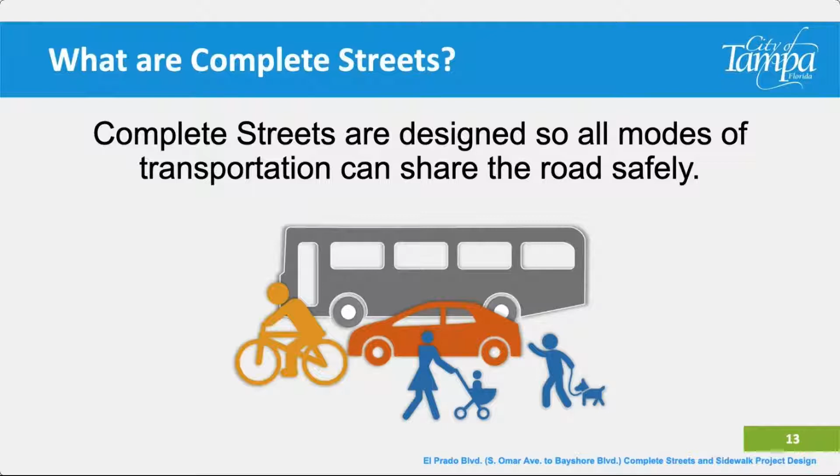Complete streets improve safety, promote active transportation, improve health, lower transportation costs, provide transportation alternatives, ease congestion, and create a sense of community. It is important to design a street to the surrounding context. There is no single design application for complete streets.

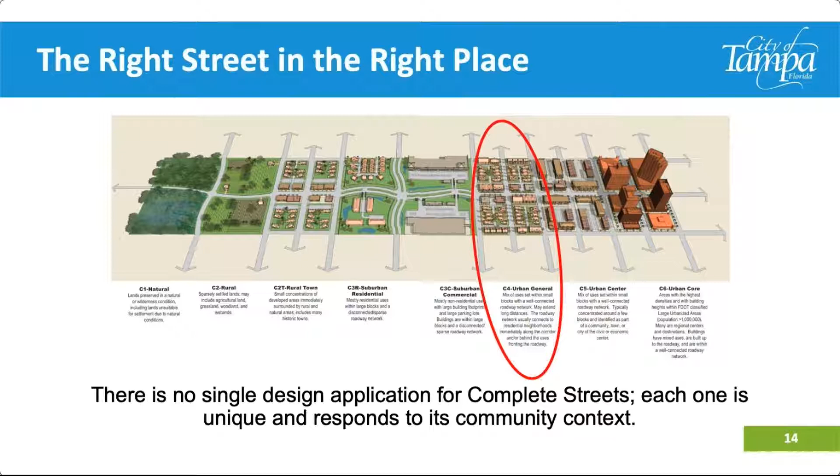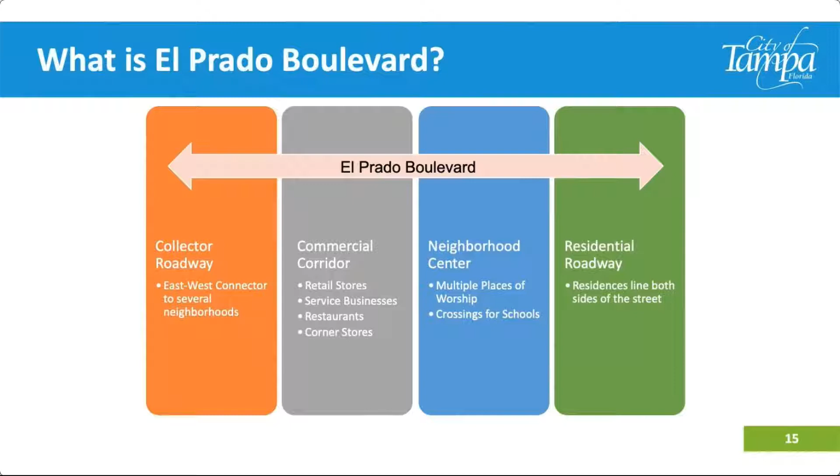Each one is unique and responds to its community context. El Prado Boulevard generally falls within the C4 Urban General Designation of the Florida Design Manual. It serves as a collector roadway connecting neighborhoods, a commercial corridor with a variety of shops, a neighborhood center connecting people to schools and places of worship, and a residential roadway with residences lining both sides of the road.

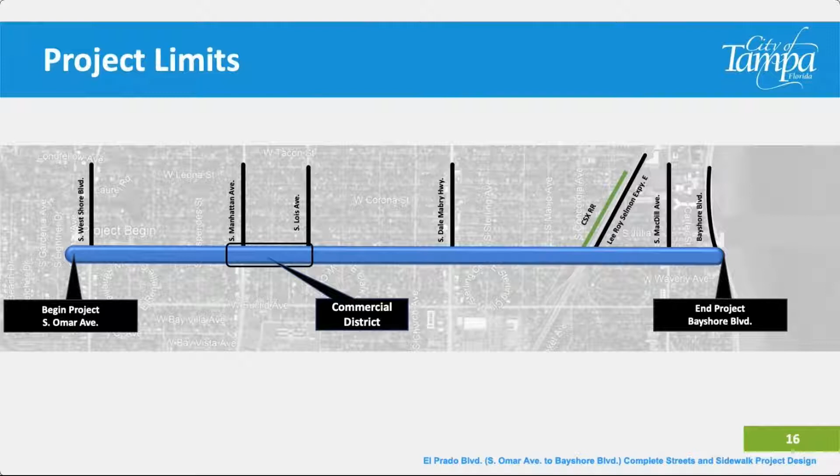The improvements proposed along El Prado Boulevard extend from South Omar Avenue to Bayshore Boulevard, with additional coordination in the commercial district. We are in the very early stages of design, and your input and suggestions are valuable. A second public meeting showing more details of the proposed improvements will be held when the design is further along.

The background behind this project is as follows. In 2009, the City of Tampa updated its comprehensive plan to encourage growth within Tampa's three core business centers: downtown, Westshore, and University of South Florida, USF. This vision for infill and urban redevelopment is predicated on enhancing mobility without relying exclusively on automobiles.

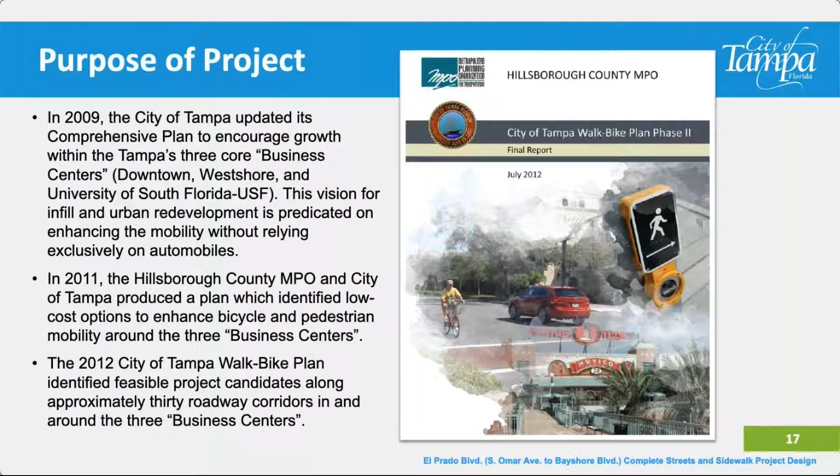In 2011, the Hillsborough County MPO and City of Tampa produced a plan which identified low-cost options to enhance bicycle and pedestrian mobility around the three business centers. The 2012 City of Tampa Walk Bike Plan identified feasible project candidates along approximately 30 roadway corridors in and around the three business centers. In the next few slides, we will examine deficiencies within the corridor that were noted by our project team.

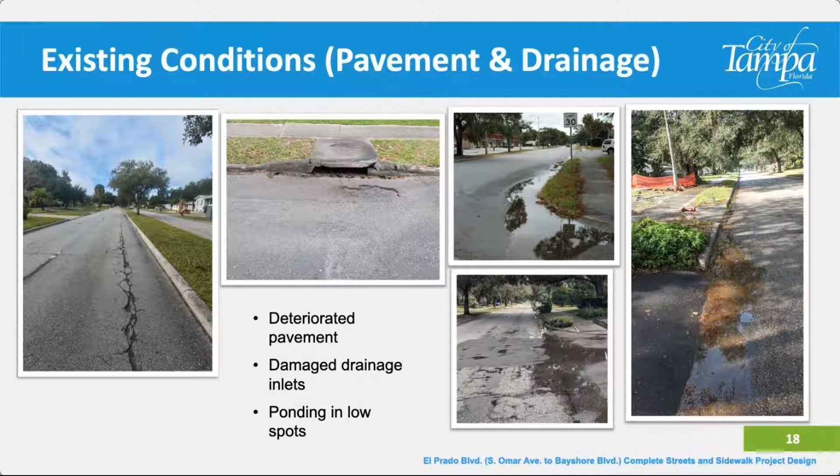Currently, El Prado Boulevard has deteriorated pavement, damaged drainage inlets, and several areas of stormwater ponding.

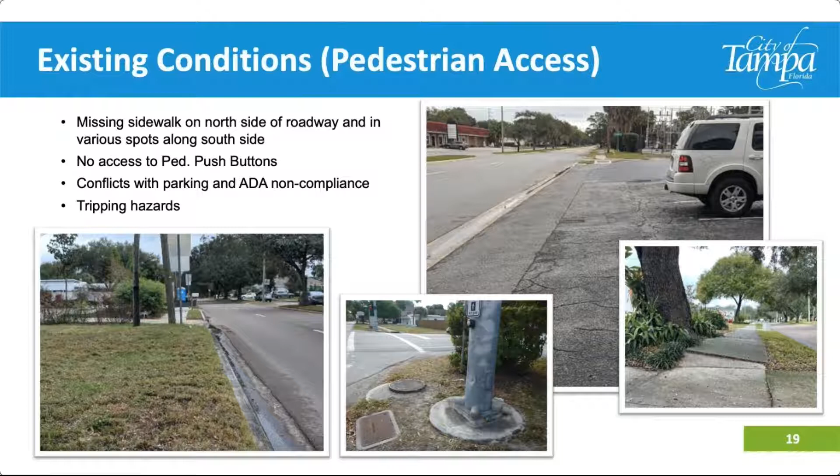Several pedestrian access deficiencies also exist along El Prado Boulevard, such as missing sidewalk on the north side of the road, sidewalk gaps on the south side, no access to pedestrian push buttons at the signalized intersections, conflicts with existing parking, pedestrian routes that do not conform to the standards of the Americans with Disabilities Act (ADA), and tripping hazards along the existing walkways.

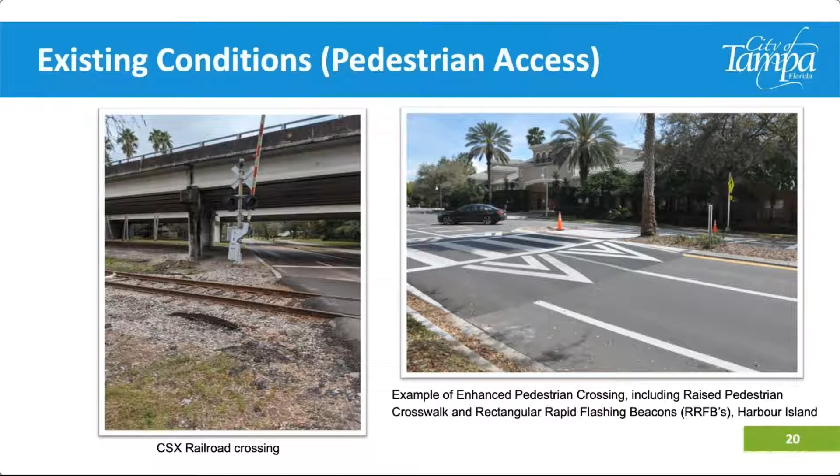There are currently several barriers to pedestrian and multimodal access along El Prado Boulevard, including missing pedestrian features at the CSX Railroad and lack of safe pedestrian crossings at frequent intervals throughout the corridor. The picture on the right shows an example of an enhanced crossing on Harbour Island, which includes a raised crosswalk as well as rectangular rapid flashing beacons, or RRFBs.

There is one area of El Prado Boulevard where the surrounding context of the roadway changes significantly: the commercial district west of Manhattan Avenue to Lois Avenue. In this area, there are significant sidewalk gaps and no safe accessible routes to businesses, multiple conflicts with vehicle parking spaces and bicyclists and pedestrians, and non-ADA compliant cross slopes. The city will be meeting with property owners in this area to discuss potential solutions.

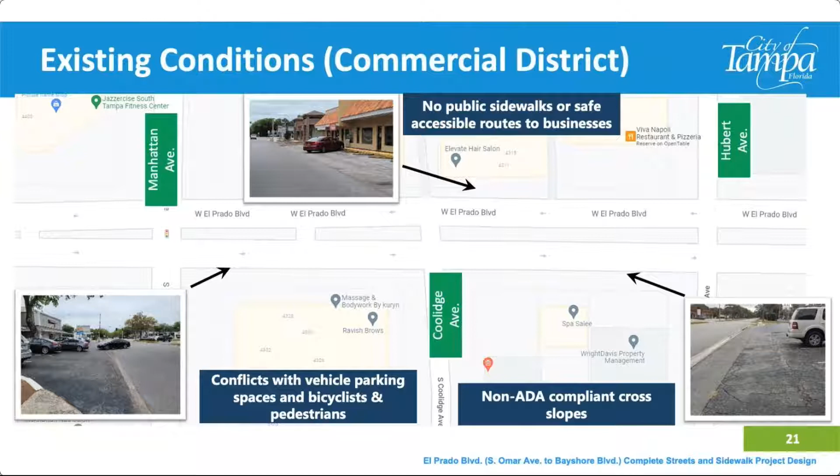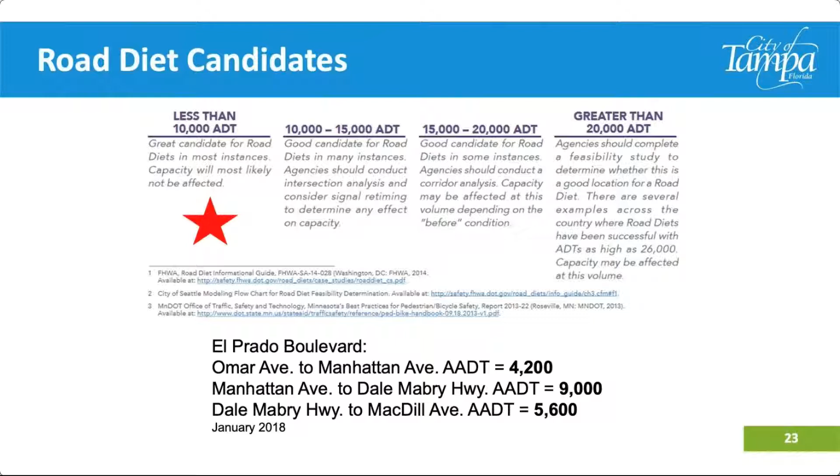This section will discuss the elements of road diet. El Prado Boulevard currently carries an annual average daily traffic volume of 4,200 to 9,000 vehicles per day. Roadways that experience this level of traffic are considered great candidates for a road diet by the Federal Highway Administration, or FHWA. Road diets are listed by the FHWA as one of 20 proven safety countermeasures.

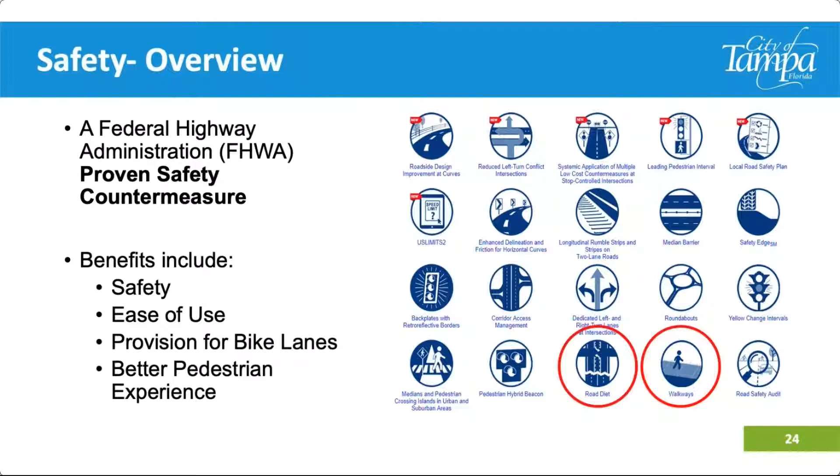Studies have proven that road diets create streets that are safer, easier to use, and provide better experiences for pedestrians and cyclists. Road diets have a superb safety record. Various studies have shown reductions in crashes after road diets were implemented, with reductions ranging between 19 to 47%.

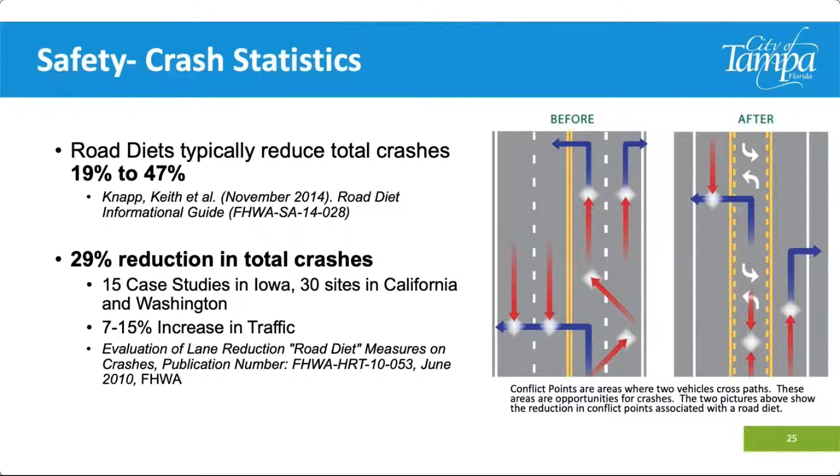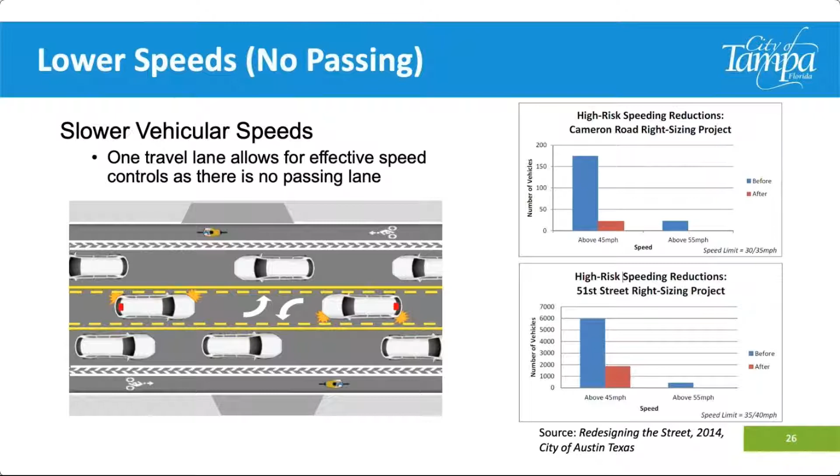The figures on the right illustrate why road diets may experience fewer crashes. Road diets reduce conflict points, which are areas where two vehicles cross paths and create opportunities for crashes. The removal of a passing lane allows slower traffic to dictate the speed. The chart on the right, from the City of Austin's manual Redesigning the Street, published in 2014, shows speed reductions on roadways that had recently been road dieted.

Now that we have gone over the benefits of road diets, this section will explore how the removed vehicular lanes can be repurposed. What is right sizing? El Prado Boulevard has excess space dedicated to vehicles that sits largely unused.

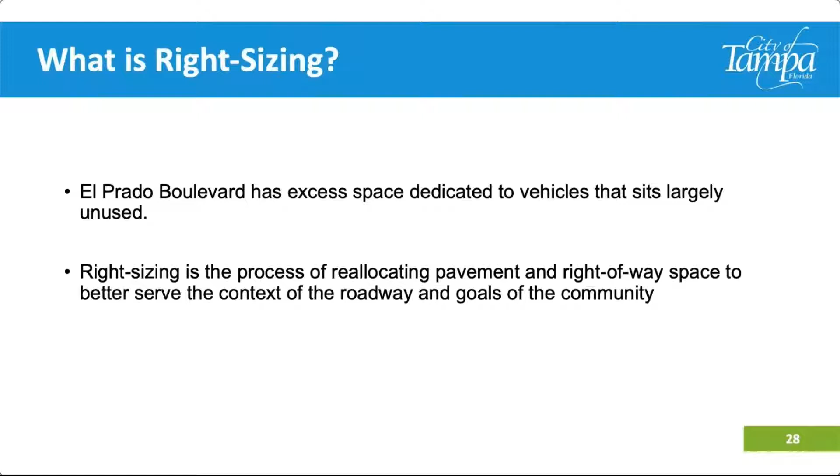Right sizing is the process of reallocating pavement and right-of-way space to better serve the context of the roadway and goals of the community. The design team investigated reallocating the unused pavement with a bike lane on the left side or a bike lane on the right side of the roadway. During this analysis, it became clear that each alternative introduces advantages and disadvantages.

The major disadvantage to the bike lane on the left side is that the bicyclist is trapped when a vehicle encroaches onto the bike lane to pass a stopped vehicle in the travel lane. This is identified as the most severe or unsafe conflict.

Another disadvantage with this alternative is that the level of service will drop. In other words, the capacity and free flow of vehicles will be interrupted and delayed by stopped mail service, deliveries, and waste management trucks.

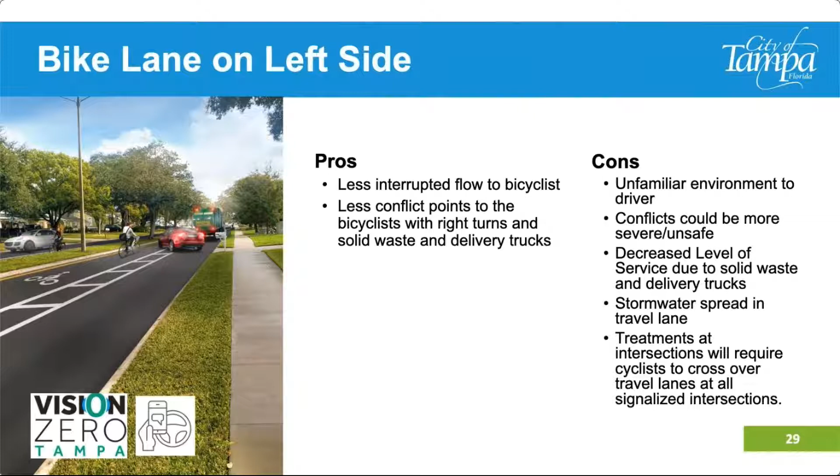The added advantage of this alternative is that the bicyclist will decide how to safely get around the stopped mail service, deliveries, and waste management trucks. If there are no vehicles in the travel lane, the bicyclist could opt to use that lane to pass. Another option could be to get around the obstruction by using the sidewalk. The main disadvantage with this alternative is that the waste management and delivery vehicles are in the bike lane.

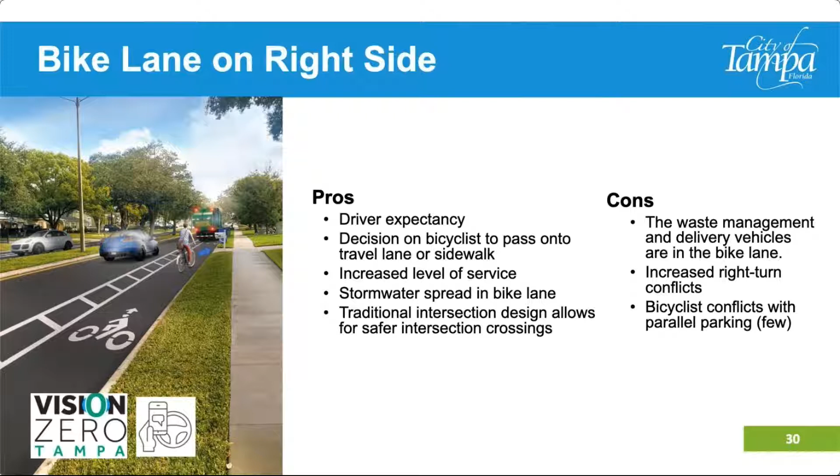From Omar Avenue to MacDill Avenue, the roadway footprint will be changed to incorporate a 2-foot paved shoulder near the median, a 10-foot vehicular lane, and an 8-foot buffered bike lane. It's called a buffered bike lane because it is separated from the travel lane by a double white stripe, approximately 2 feet apart. The buffer will also allow for physical protection features such as raised separators at conflict points, such as intersections. The roadside improvements include adding continuous sidewalk on both sides of the roadway.

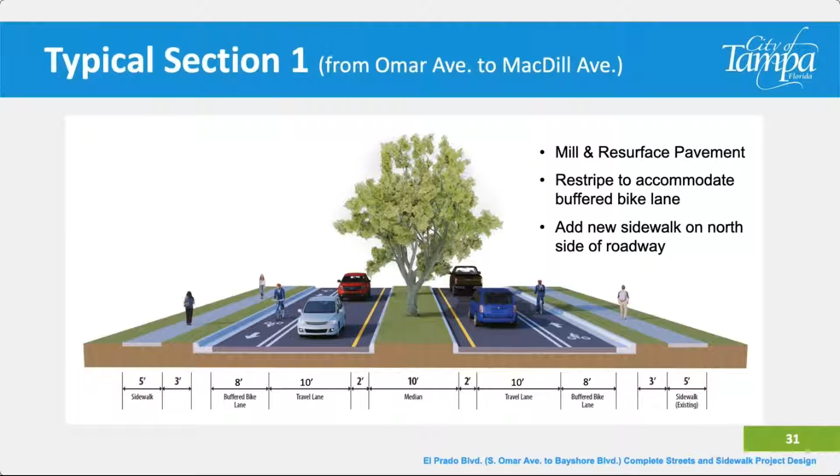From MacDill Avenue to Bayshore Boulevard, the roadway footprint won't change much. The on-street parking will remain as is. To provide continuity to the bicyclist along this constrained segment, the existing travel lanes will be designated as Sharrow lanes. The Sharrow pavement markings will alert the driving public that they are sharing the travel lane with bicyclists.

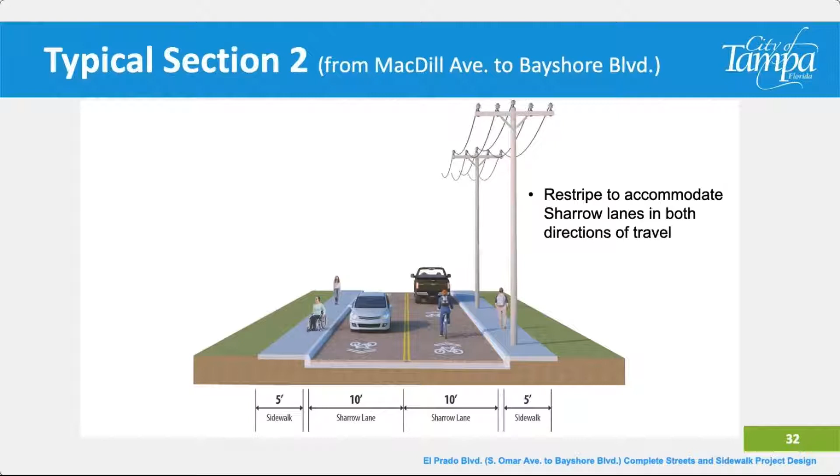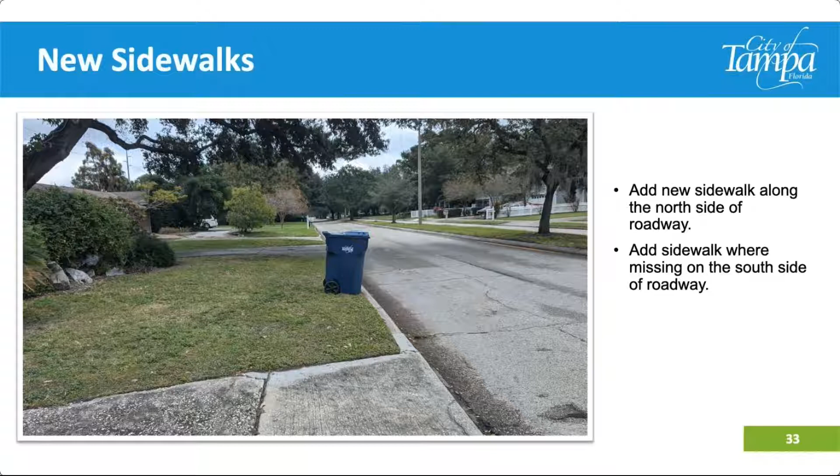New sidewalk will be added along the north side of the roadway. New sidewalk will also be added where there are currently gaps in the sidewalk along the south side of the roadway. This continuous pedestrian path will improve pedestrian safety.

Road Diet provides traffic calming benefits. The city is also considering the following other traffic calming measures: enhanced signage, delineators, raised crosswalks, and RRFBs.

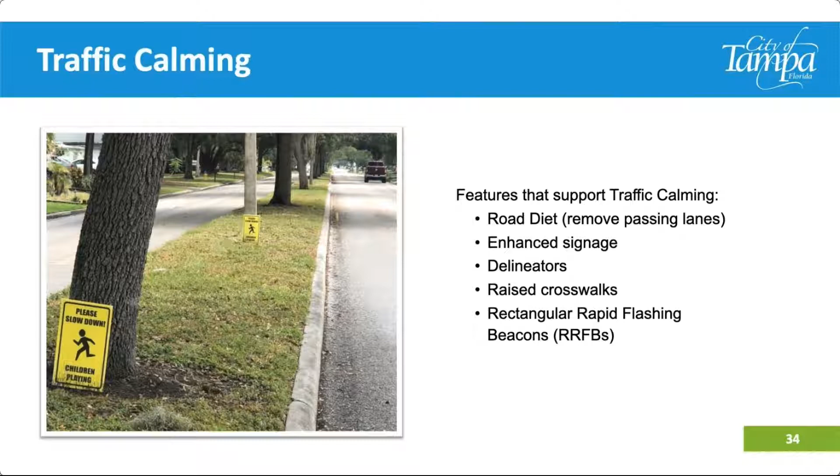The city is considering adding frequent enhanced pedestrian crossings throughout the corridor to provide safe and convenient pedestrian access to schools, parks, and other features. The chart on the right includes areas where the city is already considering enhanced crossings.

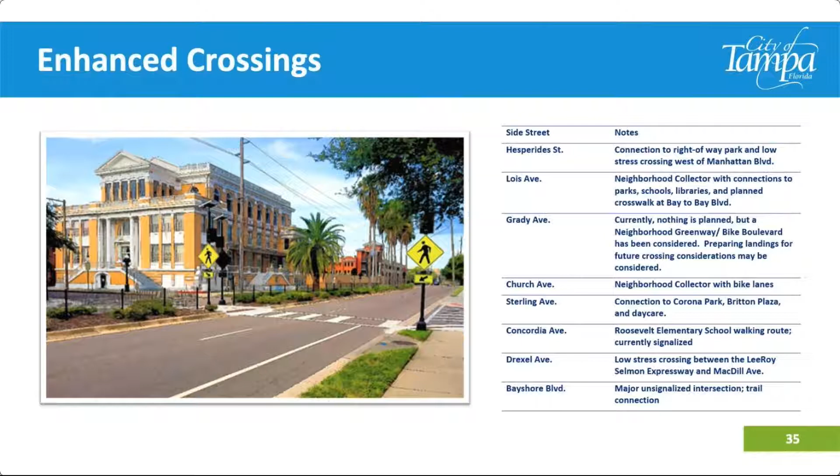This project provides for speed controls through complete streets designs. The proposed elimination of 2 travel lanes will reduce the risk of multiple threat crashes and reduce the overall distance of vehicular lanes that a pedestrian must cross. Additionally, new sidewalks will provide a greater pedestrian experience, and enhanced crosswalks with rectangular rapid flashing beacons will allow for safer pedestrian crossings.

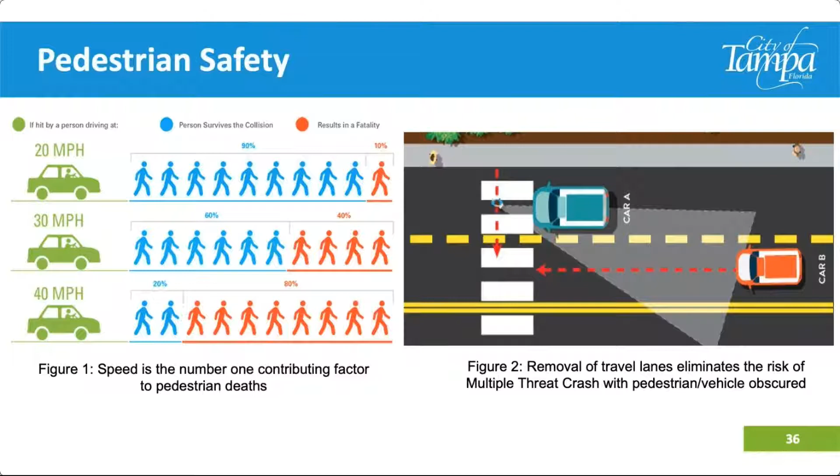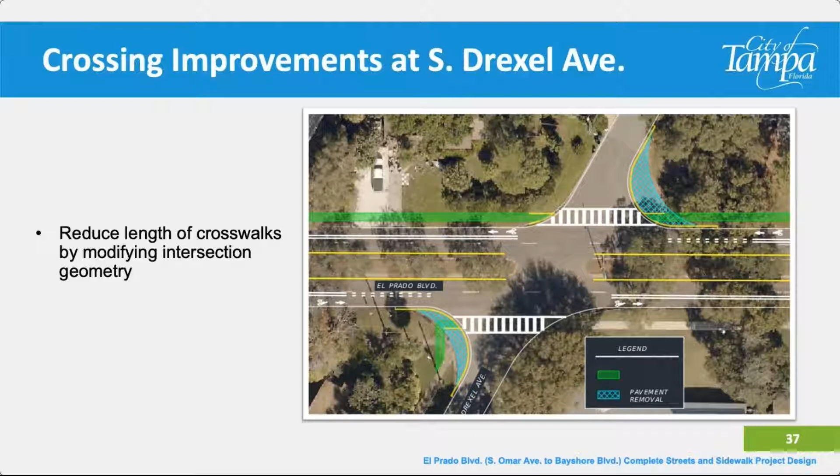And finally, the advertisement for the construction phase is anticipated in September of 2023. We encourage your input and feedback about this project.

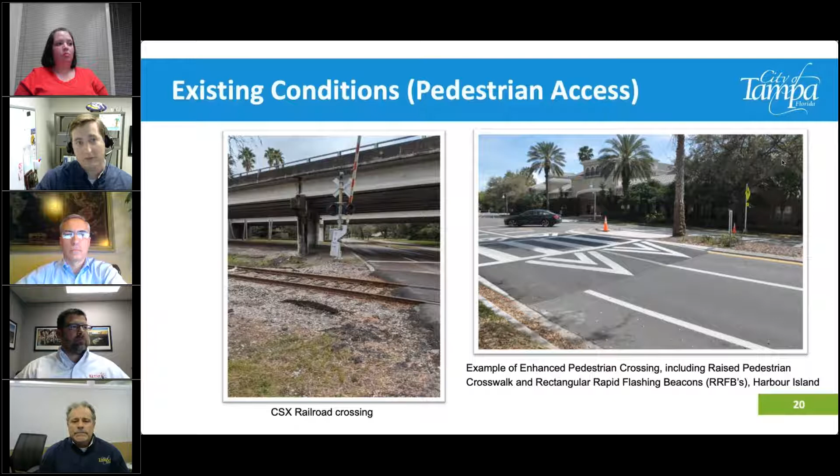You're going to have a much better roadway that is safer and can also accommodate other modes, such as cyclists - who, if they choose to commute, that takes a car off the road, so it actually reduces traffic - and a much safer roadway also for pedestrians too. So this project, like I said, the money, we could put back exactly what's there today. It will still cost the same amount of money as it would with the bike lanes.

Okay, our next question comes from Tim Northcutt.

There are 6 major thoroughfares east to west in South Tampa. 3 of them will be impacted dramatically by this project due to traffic flow on Euclid, El Prado, and Bay to Bay. The El Prado project is the only one that will have a bicycle lane each way. Why can't they paint white arrows and bicycles and still allow auto traffic on those lanes?

Because frankly, it's not needed for auto traffic. We have excess capacity, and a share lane is not nearly as safe as a bike lane. So that's the main reason. The other reason is with 4 lanes of traffic, you're not going to get the traffic calming benefits that you would with 2 lanes of traffic.

Just flat out, you're still going to experience the speeding, which I think we were recording around 43 miles per hour as an 85th percentile speed. So it's still there, it's going to be up there, and unless we take the lane, you're not going to really see that traffic calming benefit that you would see with 2 lanes or 1 lane in each direction.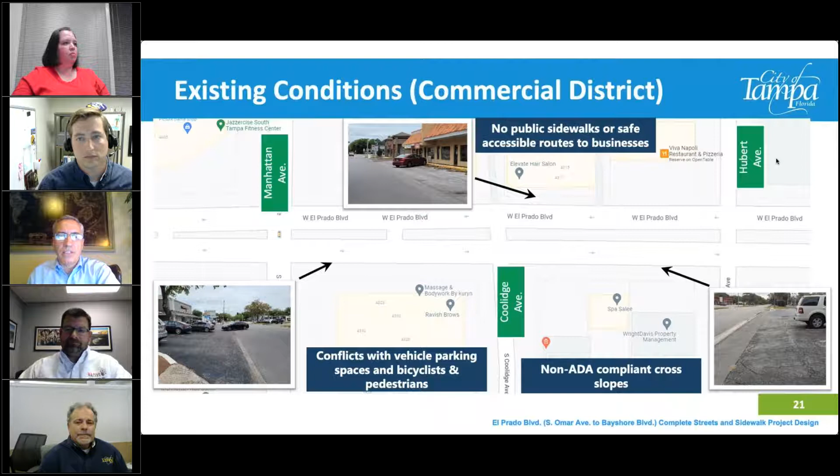We don't have full design details, but I'll talk about the Dale Mabry intersection since it currently has an opportunity for a right turn lane. If you're going east on El Prado, we'll move the bike lane in between the right turn lane and the through lane, so the bicyclist still has safe access to cross Dale Mabry. The other intersections we haven't identified yet how we want to address right turning vehicles crossing bike lanes or bicyclists making left turns crossing vehicle lanes, so we're still looking into that.

One other thing we've looked at is drainage improvements. There are some intersections with ponding, so we'll evaluate those to incorporate enhancements to stormwater flow leaving the roadway. Those will be done on a case-by-case basis. We've also mentioned crosswalks, so you might see intersection treatments dealing with that. And we did mention the Drexel crossing—it's a really skewed intersection that could be tightened up a little bit. That's another thing we're looking at for intersections.

Next question comes from Tim Northcutt: how is it safer for cyclists when homeowners will be backing out of their driveways into the bike's path?

That's what they do now—right now the cyclist path is the outside lane, so it's the same thing. They're operating under the same condition because cyclists have a right by law to ride in the lane. It's the same movement, just designating space for cycle only and not for vehicle traffic. There's a point to be made that the left side treatment has fewer conflicts with driveways, but there are pros and cons to both left side and right side bike lanes. Right now it's the same exact way, same as it is on sidewalks—drivers back up onto sidewalks where cyclists and pedestrians travel, or vehicles back into a vehicle lane which is a hazard too. People have to start thinking of modes of transportation as different modes, not viewing car, bike, everything as individual unrelated things. They're all modes of transportation, and that's what a complete street is.

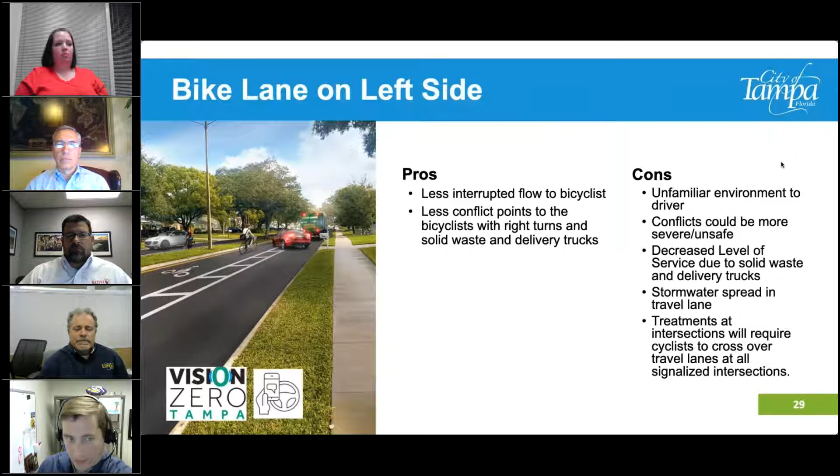And to add to that, I think the question might also be concerned with the trash vehicle being on the travel lane, zigzagging in and out. What I imagine is going to happen is that the trash truck will probably travel down the bike lane because they're picking up trash. They're not going to be on the travel lane blocking that one travel lane you have for vehicles. That trash truck is going to occupy the bike lane and go from resident to resident. They're not going to be going in and out of the travel lane. Likewise with the mail service, they'll probably stay on the bike lane, and the bicyclist will be able to get around. It's not going to be a big deal for the bicyclist — they'll see the trash truck, they'll get around. The trash truck or mail service will just continue on that bike lane.

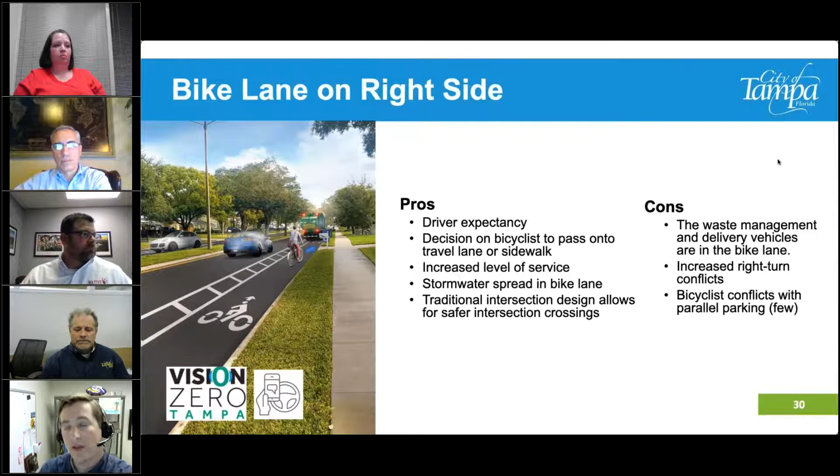The weird thing about that, if you look at those sharrows, they're actually put off to the side. It's a weird application we did, and that was people not understanding the meaning behind the sharrow, because it was brand new. No one had ever done it before. But that is, from my understanding, the reason. I'm speaking anecdotally, I wasn't here when they actually put those in.

And by the way, this is a perfect time for me to point out that between MacDill and Bayshore, there's on-street parking, and we already received a question about whether that parking would be preserved. I will say yes, that parking will be preserved, and that's why we're adopting a similar approach to Euclid here with the sharrow lanes and the parking. That way it accommodates all the transportation modes, the vehicles, the bicyclists, and the parking still stays there.

Yeah, and that section is significantly traffic calmed and has a much smaller AADT volume there too. So because of the brick pavers, it has a lot of traffic calming already in place.

All right, next question comes from Bob Nathan. How are you going to handle the eastbound traffic turning north onto MacDill at school time, specifically to allow cars going straight to Bayshore that currently get stuck by these turning cars? Would you consider removing the median near that intersection to provide a turn lane?

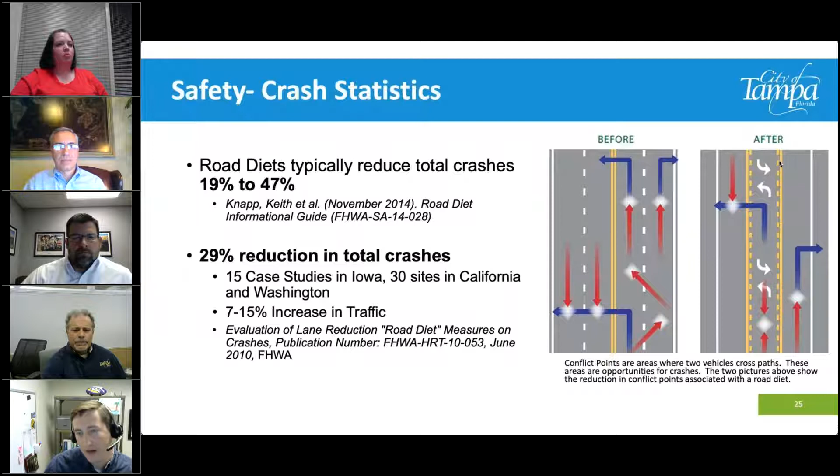We're just doing the design and everything, but we'll keep everybody up to date on the progress. We have a great website where, under residents and capital projects, there's a map showing all the capital projects within the city, including water, wastewater, and stormwater. We also wanted to let you know we'll be doing a secondary public meeting after the 60% design, so we can go out there and show you what we found from the comments we received.

Yeah, and to add—what happens between now and August—we've just received survey. We have to send out the survey crew to give us information. Like Chris mentioned, we're also improving drainage, so we're evaluating the profile of the roadway and some minor drainage improvements. These things take some bit of time to analyze.

Next question is from Jordan Eddy: Is there an ability to make the bike lane a protected bike lane?

We've looked at both. Protected means physical protection, either with delineators or a separator. We have looked at that, and we are going to look at it, especially around intersections, to see if we can get protection, because a lot of the crashes you see with bikes are at intersections with turning vehicles. So we're looking at different methods to mitigate against that.

However, given how many residences and curb cuts there are along that street—since it's all single family homes, each with their own driveway and mailbox—we can't really put hard physical protection along the entire roadway without affecting capacity on the road. So we're still going to look at areas where we can add some where it makes sense, and also in the commercial district, we're looking at adding parking-protected bike lanes. So we're looking at certain areas where that will work, but right now it's going to be on a case-by-case basis. As we design the corridor, we'll have to find places where we can actually fit that.

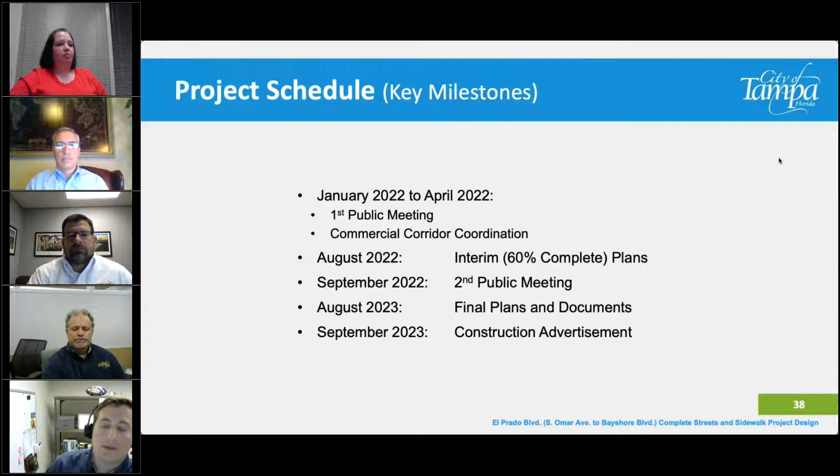When I look at Clark and Euclid, these projects have definitely not reduced speed. What can be done this time to ensure speeds are in fact reduced? Yeah, I'm aware of the changes on Clark and Euclid. I don't honestly know if they've reduced speed or not. But one of the problems with the Euclid project is that those lanes, when traffic isn't bad, say during the 21 or so hours a day where you don't have peak traffic and you don't have parking on the side of the road, you basically have a 17 to 18-foot wide uninhibited paved space that cars feel empowered to speed on. With the absence of bike lane and parking, it's really hard to enforce. That design does not enforce lower speeds.

For the El Prado project, the road diet itself is one of the traffic calming measures, but we're also looking at other measures such as raised crosswalks to really enforce speed through good design, not through actual law enforcement. It's one of those things we'll work through. I really urge you, if you can, go out to Davis Boulevard, that project's wrapping up.

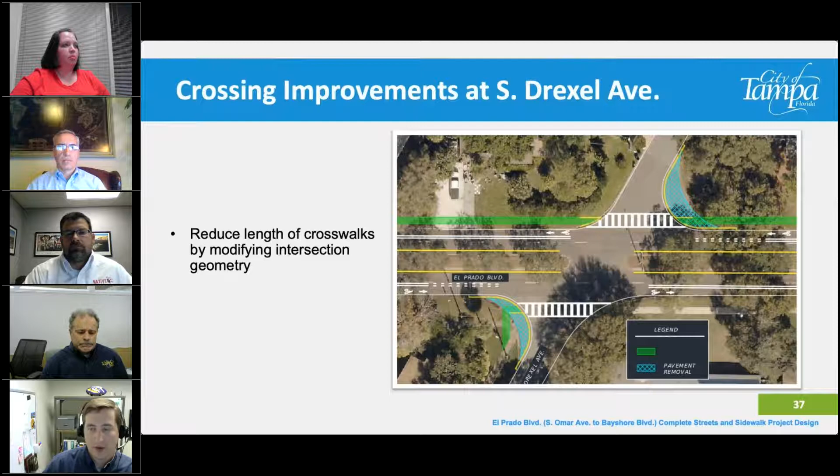I did want to address a comment from a resident that said people might be getting confused about what we mean by right of way in their front yard. There's a piece of grass between the curb and your house. Your property line doesn't go all the way up to the curb. There's a fictitious property line, and that's where the right of way ends.

Anything from that property line to the back of curb is actually public property, City of Tampa owned right of way. I don't know the exact dimension, I think it's 30 feet, but I could be wrong. Bruno, you might know offhand how wide that swath generally is, but that's the piece we're talking about between the curb and your property line.

So if you do a Google search on the Hillsborough County Appraiser's website, you'll be able to see exactly what your property outline looks like. You'll see that it does not, like Kel is saying, extend all the way to the roadway curb. It's shy of that.

We would be putting the sidewalk technically in what appears to be your front yard, but that front yard is not part of your property. It is maintained by you, every resident, myself included. I mow all the way to the curb line, but it is not my property. My property ends on the edge of the sidewalk that faces my house. The sidewalk itself and the grass between the sidewalk and the roadway is either city, county, or state property, and that's the way it is.

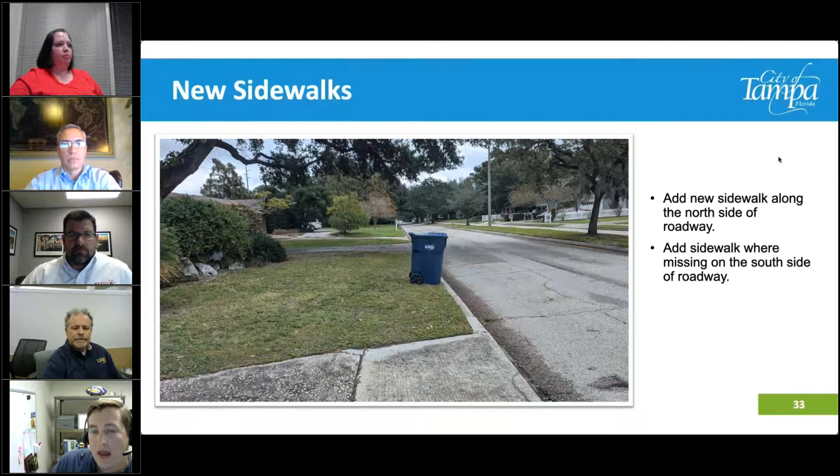The only one we're considering for removal is Concordia. We're looking at that in favor of, if we remove that, it would be with the addition or installation of an RRFB, the little yellow flashers. But right now we're kind of mulling that over - what alternative would be better? There's benefits and costs to both the signal and the RRFB. So we haven't made a hard and fast decision on that yet.

But that's the only one we're looking at. We're not going to be adding any other signals. We'll be adding enhanced crosswalks - that's what's on the screen now. Those enhanced crosswalks don't have a signal, but they do have the yellow flashers.

Next question is from Bernadette Corey. Will bulb outs be introduced at intersections to enhance pedestrian safety? We have one intersection that we looked at for redoing the curb line a little bit, to tighten up the curb radius there, but we aren't looking at bulb outs for most of the project.

There's also a portion in the proposed design that wouldn't lend itself towards bulb outs. We are looking at protected intersections where we'll be adding a separator between the bike lane and the vehicular lane, and that would act as a bulb out in a way, because it would allow space for a pedestrian to go out into the street before they hit a vehicular lane. The only other area we're looking at doing more traditional bulb outs or something similar would be the area by the commercial district from Manhattan to Lois.

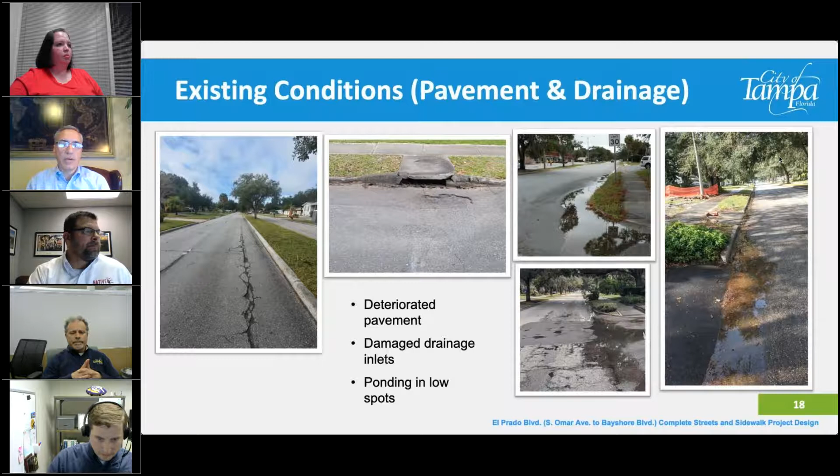The interesting thing is Dale Mabry is also part of an FDOT project that's currently underway. So we have to coordinate with them, because a DOT roadway project typically extends around the returns, basically the radial corners of the intersection. So DOT is currently doing some improvements there, and we have to coordinate with them to make sure we don't step on each other and undo what the other agency is doing.

Right now DOT is looking at improving that intersection. We would be improving the other intersections, such as Sterling, for instance. We would be addressing that one, and we would do whatever DOT is not doing at Dale Mabry on our project. That one is also programmed for fiscal year 24, last I checked with DOT, so they'll be happening right next to each other.

Next question is from Leonard Wolfson. There have been several references to a lack of bike riders on El Prado. Is it possible that there's a lack of bike riders because it is unsafe to ride on El Prado in its current configuration? Yeah, we mentioned that earlier too.

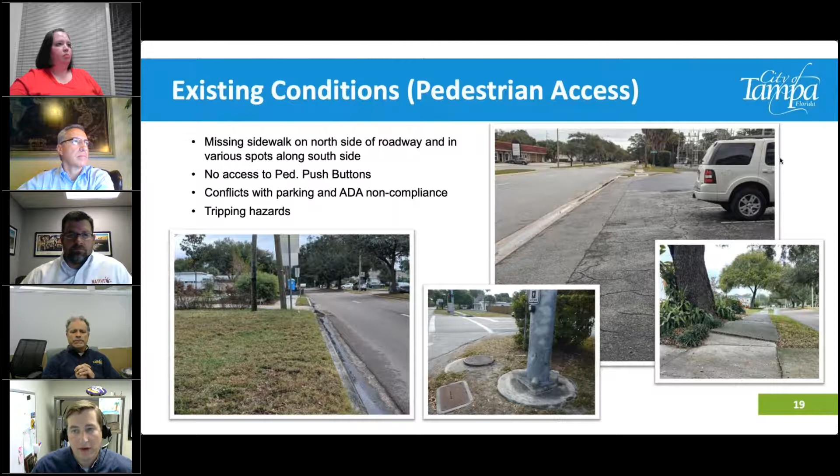Cyclists will go where they feel safe. If they don't feel safe, they're not going to ride on the road, so they'll tend towards other areas. The problem with South Tampa is you have some pretty significant barriers, such as Dale Mabry Highway, the Selmon, and the CSX railroad tracks that create barriers for people to cross. So a lot of local roads do not cross there. Even if you want to ride a bike from Westshore to Bayshore and you're not riding on a collector roadway, you're going to have to hit a collector roadway for at least part of your journey. That's a big point of what we're trying to do with this project.

Next question is from Tim Northcutt. Could you remove the median to allow for two bike lanes five feet wide and still keep two lanes each way?

We actually considered that, and it's cost prohibitive. We looked at that from this consultant and other consultants, and it's like, I don't know, a $16 million project or something like that.

This road really wasn't a great candidate for that type of improvement. You also have to look at all those trees in the median; those would all have to be removed if that was the route we were to go. Plus you lose the median for turning and anything else. Like we were talking about U-turns, you wouldn't have that. It would just be a double yellow line, and we wouldn't have any of the safety benefits at all—all the traffic calming, everything else would go away.

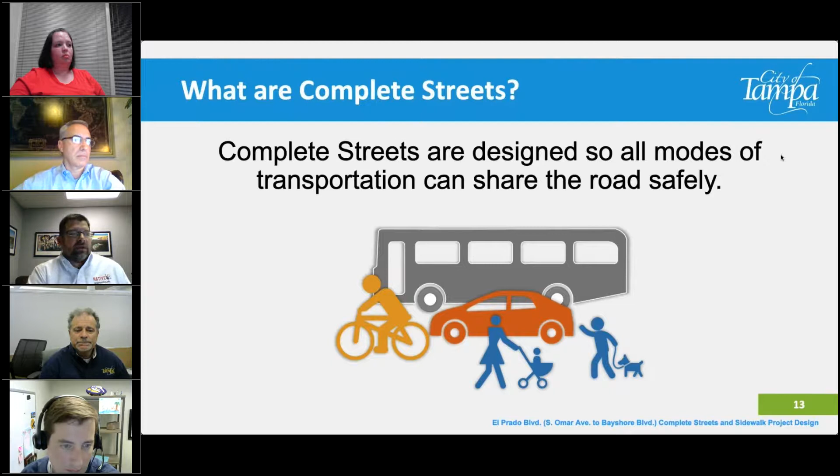In the commercial section from Manhattan to Lois, there's a significant number of businesses through that segment, so we have to take special consideration that we don't impact any of those businesses. We also don't want to take away any of the parking that exists along that section of the corridor. So there'll have to be some more heavy focus and attention on that section to ensure safe movement of pedestrians and bicyclists without impacting or being impacted or creating additional conflict points with the patrons of those businesses and people parking in those spaces.

Those spaces currently, similar to the driveways, the people that park in those spaces have to back out into the roadway. So we'll look at some other ideas there for moving pedestrians and bicyclists through that segment. But with that, there'll likely be some additional landscaped islands with some additional tree plantings through that segment.

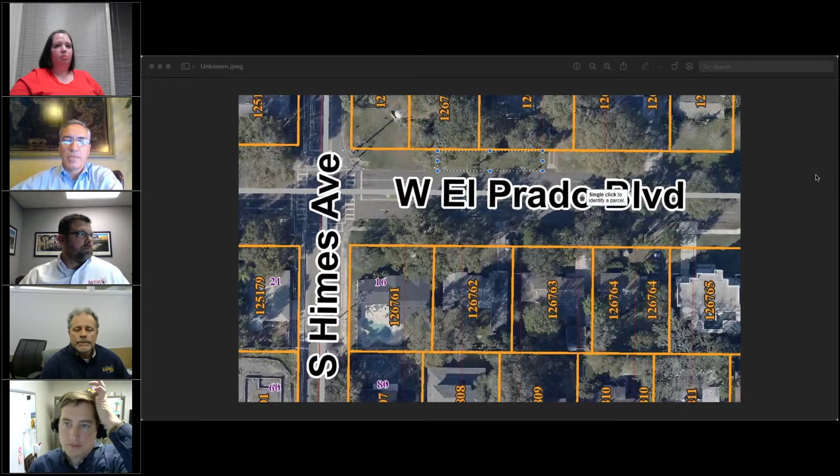As far as the crosswalk at Bayshore, the median along Bayshore has got quite a bit of vertical difference. Northbound lanes are significantly lower than the southbound lanes, so we're going to introduce a zigzag crosswalk to get ADA folks and pedestrians from the west side of Bayshore to the east side. We've got that under a concept design, and we'll be using RRFBs, rectangular rapid flashing beacons, so pedestrians can push the button, turn the light red for traffic to stop, and then cross safely.

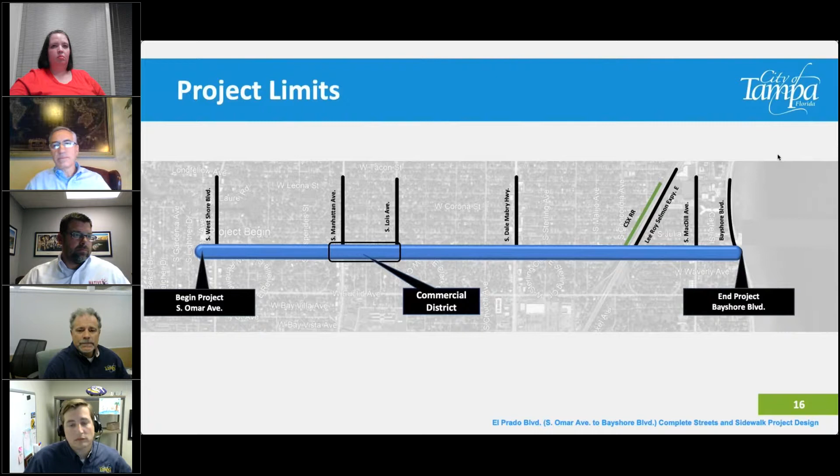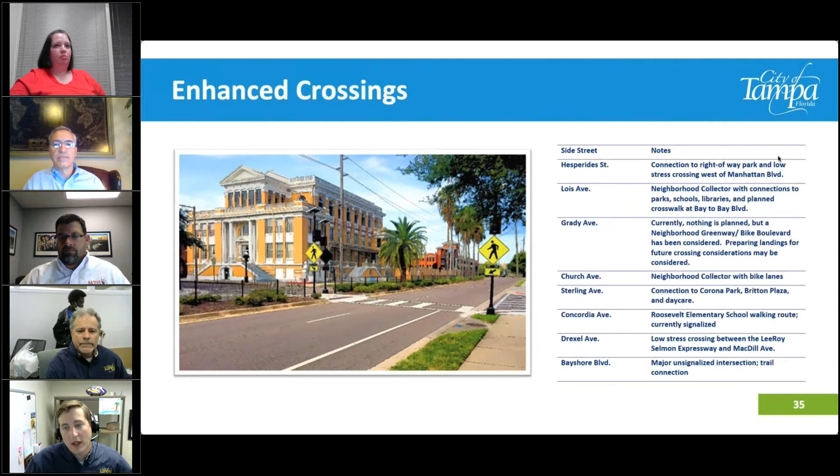Next question is from Lenise Underwood: How did you get your data for the support? I believe she's asking about where we said we had support. Well, the chat log questions are going to be published with the public meeting. There's various questions and comments we haven't been reading, and generally if they weren't asking a question we glossed over them for time purposes, but we will publish that, and there's quite a few supportive comments already. If you're asking where we get support or opposition comments, those can be emailed into the city, and that's something we always take into consideration when doing any kind of design.

Next question is from Marta Killian: Was there consideration of traffic cutting through to side streets when the road gets backed up? For example, between Drexel and MacDill, people cut through the neighborhood to get to MacDill. Yeah, I understand. The reason they're cutting through now is because the intersection is backed up. When you do a road diet, the intersections largely remain the same amount of lanes, going the same directions—left turn lane, right turn lane, everything else. If you can't improve the operations of the intersections, you're still going to have the same people trying to cut through. However, between intersections, people don't cut through because traffic is moving through on the node; they're trying to get around the intersection. So you can expect the same amount of neighborhood cut-through traffic you experience now. There's nothing else I can say besides it's going to be there just like now, but we're not anticipating any increase because we're not changing how the intersections operate.

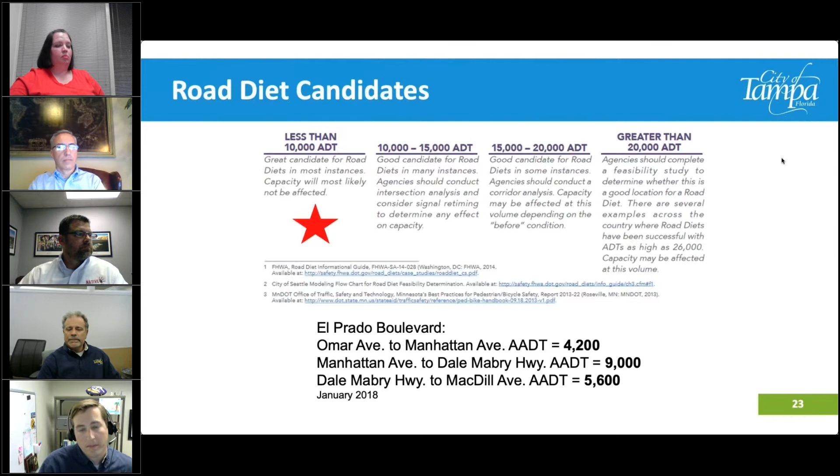The last question is from Lanice Underwood: What will you do about the bike lane from MacDill to Bayshore? That is a concern for bikers—there are cars parked daily narrowing the streets, and if you're talking about safety, that is not safe.

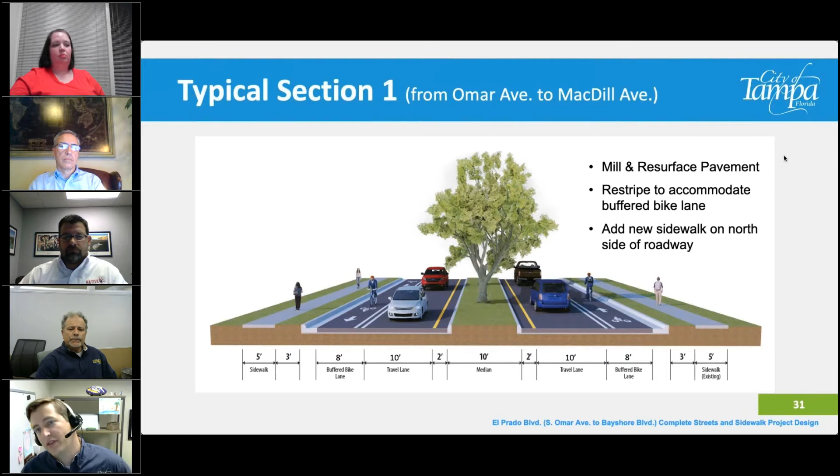Yeah, so the bike lane, we talked about that too, we understand the issues there. In that section, the roadway is narrower, and we are looking at doing sharrows there. I understand it's not as nice as a bike lane, but the road is brick, which provides traffic calming. I also understand that's not the best material to ride a bike on, but options are kind of limited in that area. So our plans right now are to provide sharrows, not bike lanes. We're constrained in that area, with the right of way as well as all the residents that have already built up. Their best option is to provide share lanes, so bicyclists share that lane with the traveling public.

That was our last question for the evening.